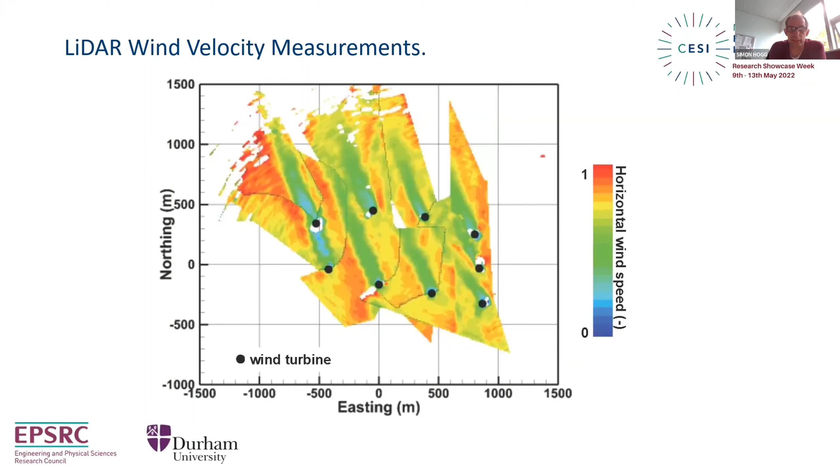You can see from the figures above how, for this regular wind farm layout, there are a number of directions the wind can come from where there's significant potential for interactions between the turbines, and that's borne out in the calculated result at the bottom, where for some wind directions there's quite a significant, almost approaching a 40% reduction in power output. Almost half the potential power output from the wind farm is lost due to these interactions between the turbines.

There are some directions where the interactions are minimal and you get a reasonable power output from the farm, but in other wind directions this has a big effect on the power output. So the piece of work I'm going to talk about now is where we developed a model for calculating this effect, and then applied it to some of the wind farms in the northeast region.

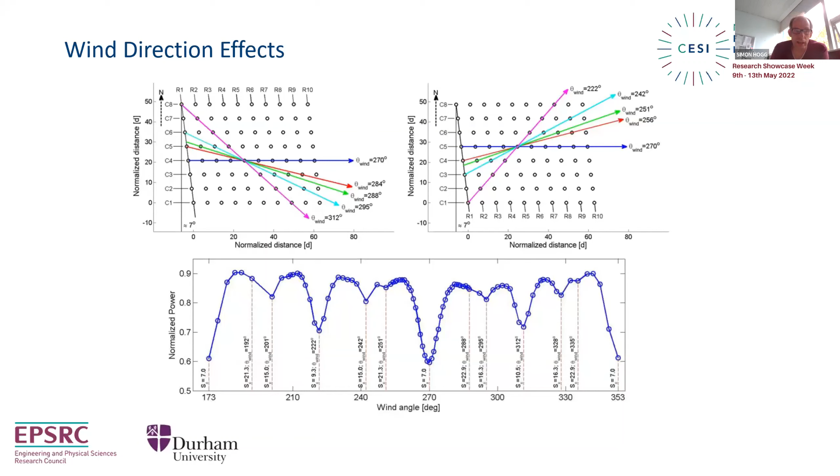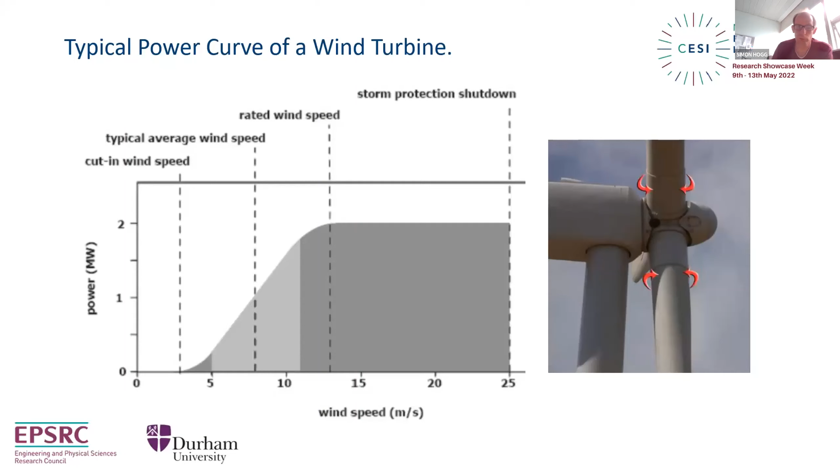Okay, so that was basically for a turbine operating in isolation. Now we need to think about how they interact and how we model that.

And so the wake that's behind the rotor of a wind turbine, as that moves downstream with the air velocity, it's going to spread. So the wakes actually increase in diameter with distance from the turbine. You could sort of see that in the photograph that we started with on the first slide there.

So there is the Jensen wake model. That was something that was actually developed in the 1980s, and it's still widely accepted as a good first order model for predicting how wakes grow as you move downstream from turbines. You can see the model in the expression on the bottom of the slide. So we used that model within the CESI work to model wake growth with distance downstream of the turbine.

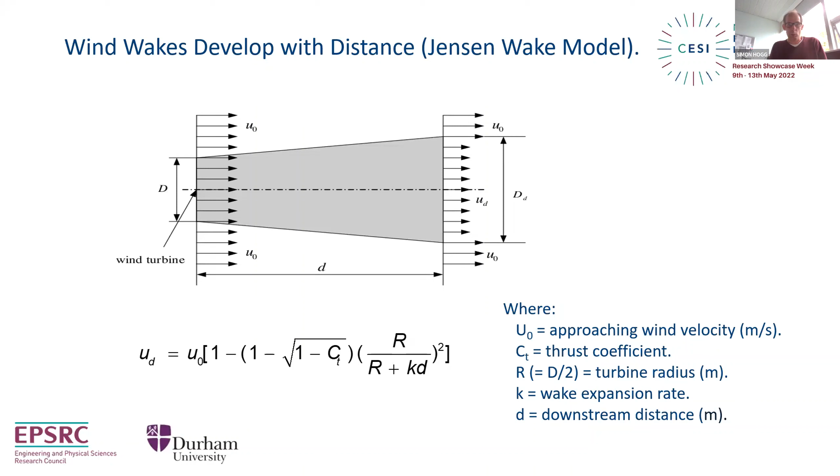So the power curve told us how much the individual turbines would deliver for a given wind velocity. And then in terms of modeling the wakes, this was the first step. And then there's a second important step in terms of then modeling the effect of the wake on the turbines that are downstream of the upstream turbine.

And the alignment between these turbines is such that only a proportion of that wake is interfering or interacting with the turbine downstream. So the model that we developed also needed to have some way of calculating the proportion of the upstream wake that actually interacts with the turbines downstream of it.

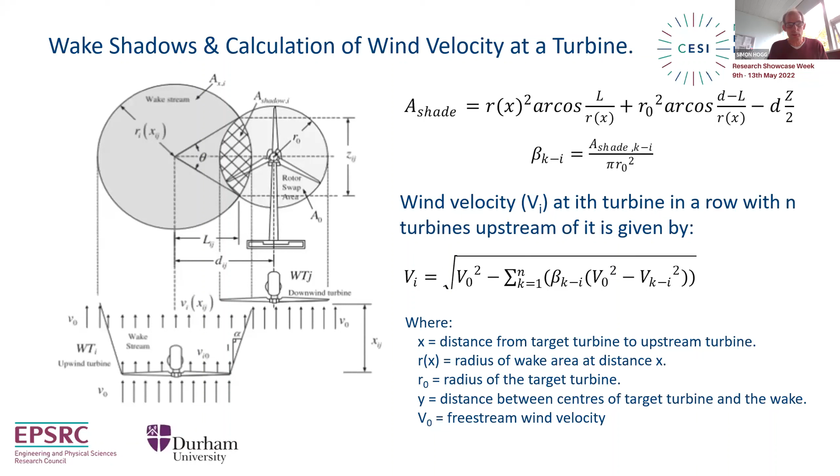So basically we developed the third part of the model, which was once you knew where all the turbines were relative to each other. That was part of the inputs to the model, which would be the power curves from the individual turbines and the locations of the turbines relative to each other.

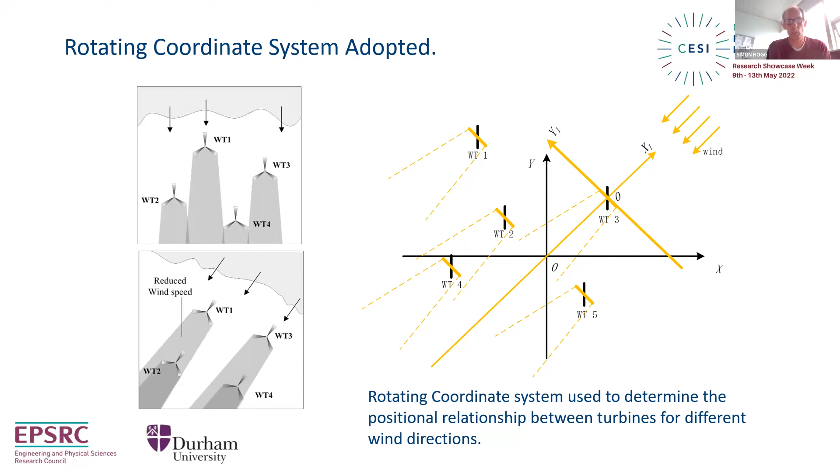Once you knew that, if you selected a wind direction, you can write down a coordinate system that is aligned with the wind in the way shown in the figure, and then the locations of all the turbines can be expressed within that coordinate system. From that you can get the geometries which allow you to calculate the wake interaction effects and ultimately the power output of each of the turbines.

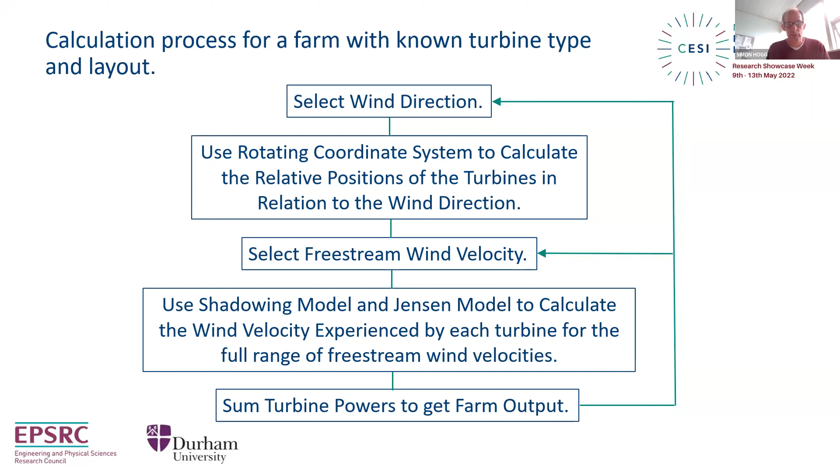So that's a very simplistic flow chart showing the process. You select a wind direction, you know where the turbines are, so you use the rotating coordinate system to align with the wind direction so you can work out where the turbines are relative to each other for that particular wind direction. Select a free stream velocity and then use the shadowing model and the Jensen model to calculate the power output of each turbine, then sum all the turbines to get the overall farm output, and iterate around those loops for each wind velocity and each wind direction.

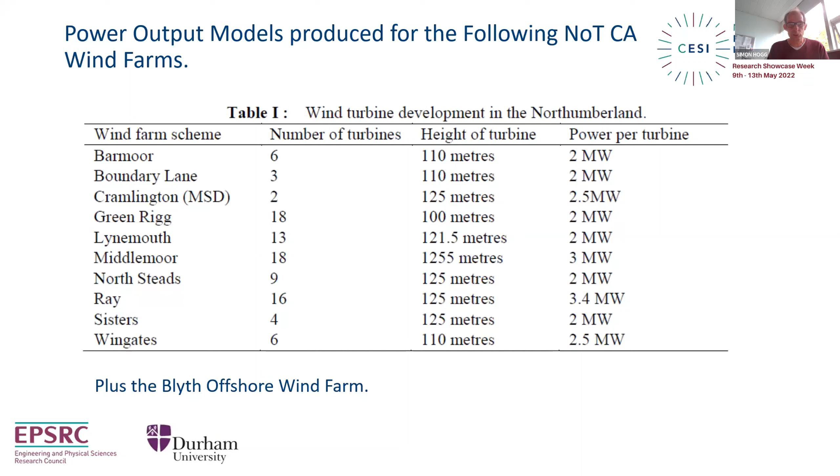So I'll say just very quickly now in my last couple of slides something about one of the onshore turbine farms, and also the Blyth offshore wind farm. So that's the result for the Ray onshore wind farm, which was in that previous table. It was 16 Senvion 3.4 megawatt wind turbines.

The researcher that did this work actually used satellite positions - you can see the satellite photographs, one on the left-hand side there of this wind farm - to locate the turbines relative to each other. That went into the model. When we ran through the model I've just described, you can see the output from it there, which is that surface plot with the two horizontal axes being wind direction and wind speed, and the vertical axis being the power output of the farm. So 16 times 3.4 megawatts gives you something like 54 megawatts in total maximum output.

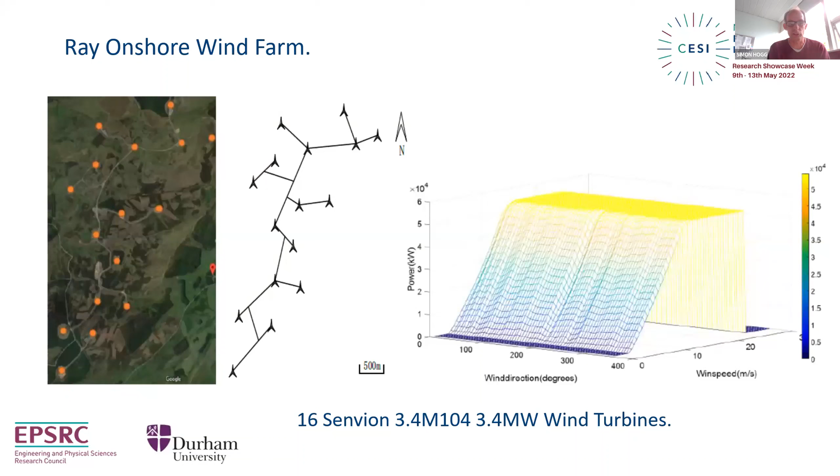You can see from the surfaces there how the interaction effects produce these undulations in the slope surface of the carpet plot, which reflects the different wind speeds, different wind directions, the different interactions between the turbines in that particular layout. Probably a more stark example is Blyth.

Sorry about the picture on the left-hand side there, but the Blyth offshore wind farm - there's only the existing array, the other two arrays aren't there yet. The existing array, the one in dark blue, consists of 5 eight-megawatt MHI Vestas turbines, so 40 megawatts in total. You can see those turbines from Blyth or from Tynemouth Beach even. They are all more or less in a line, as you see in the figure there.

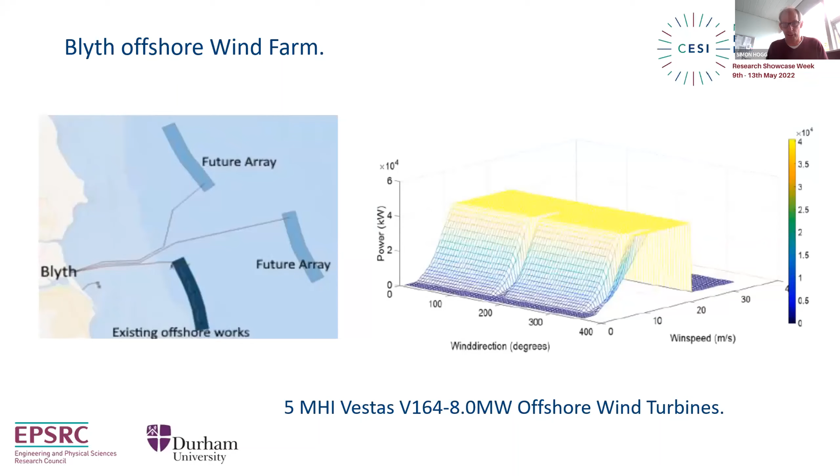The result from the model reflects that, in that you can see these two very sharp deviations in the contours when the wind is aligned in one direction or the other with that row of turbines. For all the other wind directions, you tend to get pretty much very little to zero interaction effects and the maximum output. Okay, so that's what I had for you, just to give a very quick flavour of what we did in modelling wind farms under CESI for the North of Tyne region.

I think now if I hand over to Andrew for the first of his presentations, he'll take you through that. So Andrew, if you can - I think I stopped sharing my screen - so if you can share yours, brilliant. Can you see that all right? Yeah, I can see that. Good, yes, thank you. Okay, over to you.

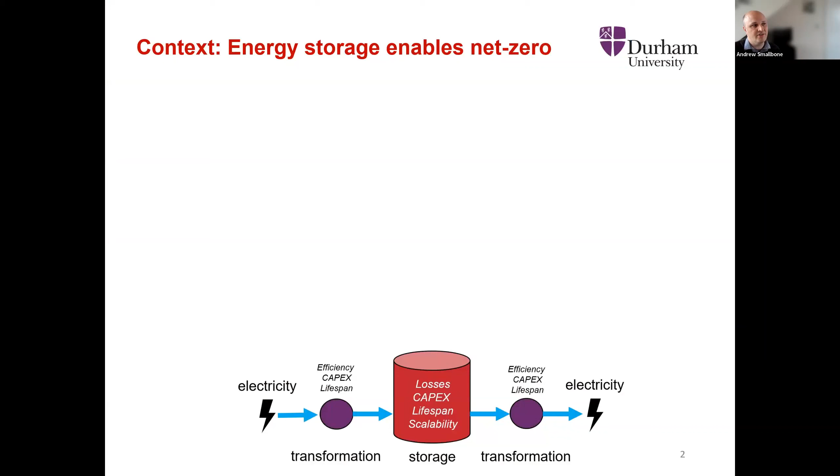Right, thank you very much, Simon. So yeah, this was some work we carried out for CESI in 2017. I was just refreshing some of my memory of doing it, but yeah, so we were looking at the levelized cost, and we did a levelized cost evaluation for energy storage technologies. So I'm Andy Smallbone, I'm an associate professor at Durham, but when I did this I was at Newcastle. So the context of this is, obviously from a future energy systems perspective, energy storage is extremely important, and it could be said that it enables net zero.

So what we were interested in was to explore some of the key technologies that will unlock that, and understand their cost and their impact. So it's got two roles, really. Energy storage first is to enable the greater deployment of renewables and thus to achieve net zero more readily, but also potentially energy storage could be used to displace the role that fossil fuels hold in delivering resilience and flexibility. And what we wanted to really get to grips with was to understand some of the challenges around that. So there are many forms of electricity energy storage, and we wanted to understand kind of high-level questions like which one is cheapest, which one is the most deployable, what's that same world going to look like in 10 years' time?

If you look at that schematic at the bottom there, you can see the terms that we were looking at for energy storage, and if you look across the technology set, actually whilst the input and output of electricity, there's lots of different ways that you can go from the input to the output. So in almost all cases, there is some form of transformation of that electricity into a form that is suitable and scalable for storage. And there are different factors associated with that. It could be some losses, so therefore some efficiency losses through the process. It could be the cost of that transformation in terms of the unit costs or the CAPEX costs, as well as the lifetime of that particular unit.

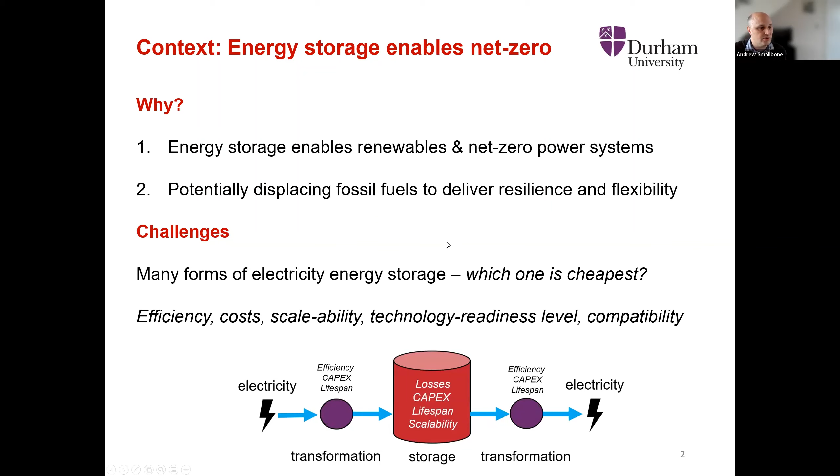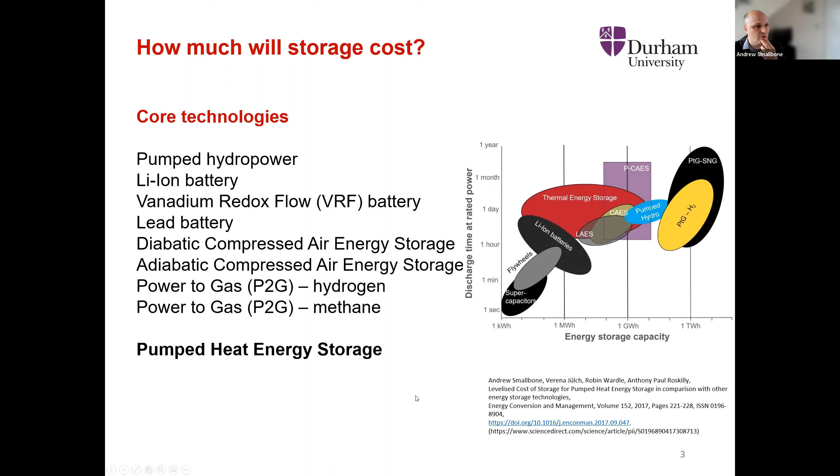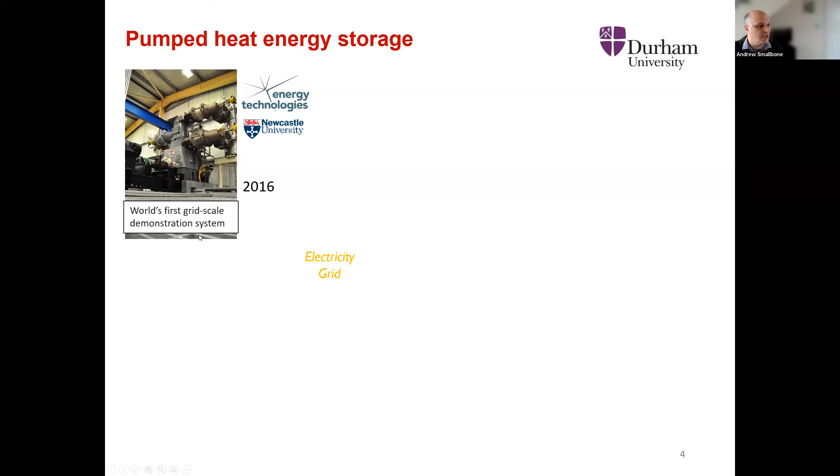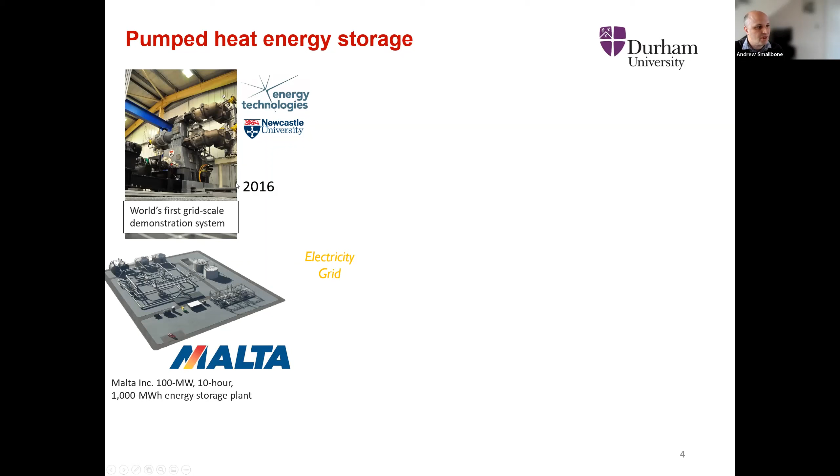So what we were doing is we were working on a concept of pumped heat energy storage with the Energy Technologies Institute from about 2016. During the time of that development, there was a major investment by Malta, which was funded by Silicon Valley, into the same kind of technology. They were developing a 100 megawatt scale system. And over time, that's evolved into an area now of energy storage research called Carnot Batteries. So during that period of time, we were involved in a lot of this, and a lot of the work that I'm presenting now has actually shaped a lot of that.

So the system that we were looking at, and the ones that are really discussed in Carnot Batteries, is not dissimilar to this. The one I've done analysis on here is a system where you take electricity from the grid or a renewable energy source, use that to turn a motor which powers a system running as a heat pump normally as a charge. So as a heat pump, you push a working fluid around the system, and that heats up a hot thermal store and cools down a cold thermal store.

When you decide you've charged the system enough, you stop doing that, and to discharge the system you basically run the same technology in reverse. You use the temperature differential between the two stores to power the rotating machine, which brings electricity back into the wider energy system. You can do that on demand.

What we really wanted to understand is that the storage medium here is a tiny amount of money and very scalable, but you need all the costs associated with everything else to get that to work. So we wanted to understand how that all came together, really.

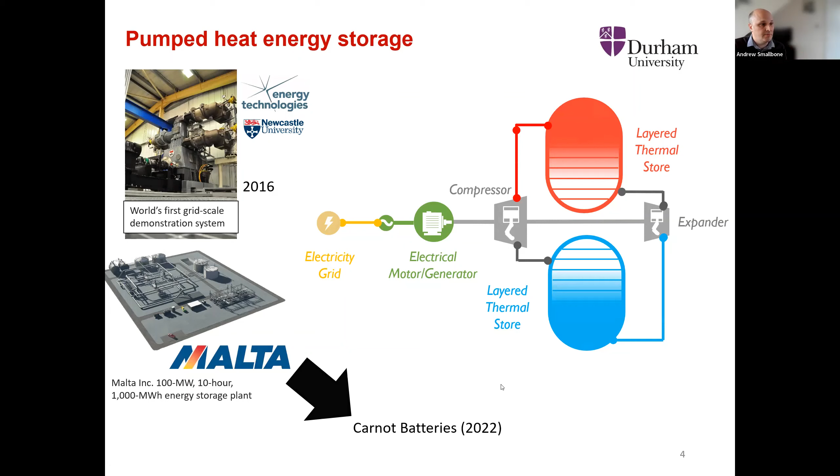So what we were being asked was, how do things like this energy storage technology compare with others? What's the round trip efficiency? We wanted to push the discussion around the cost of storage rather than the efficiency, because our system was cheaper overall but less efficient, and we wanted to understand that a bit more.

The challenges we had were that the technology we'd built was at a low technology readiness level. It was a first of a kind system, and we weren't that sure how to scale up. The common question we were being asked is, what is the nth of a kind cost? So what's not the first system - what's the 10th? If you've deployed this at large scale, what would energy storage from this kind of solution look like?

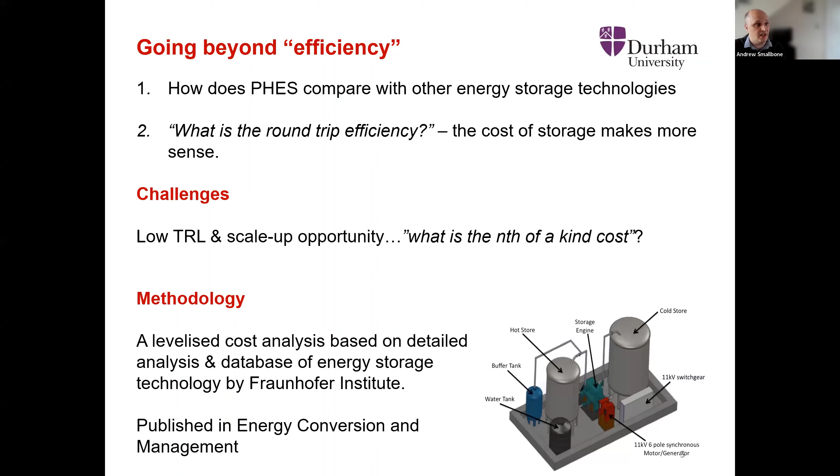So we utilized levelized cost analysis, in strong collaboration with the Fraunhofer Institute, who'd already built detailed libraries of tools and models that can unlock greater understanding of some of the costs. They also had a lot of data on the wider systems, and supported us in developing our own levelized cost analysis of this particular technology set.

What we went out and did was decide on a particular size of system we were interested in. Just for simplicity, it was a 2 megawatt system stored for 8 hours. But if I was to redo this now, I'd probably add another zero or two zeros onto that system to really understand what its impact would be. That's just where the market was back then compared to where it is right now.

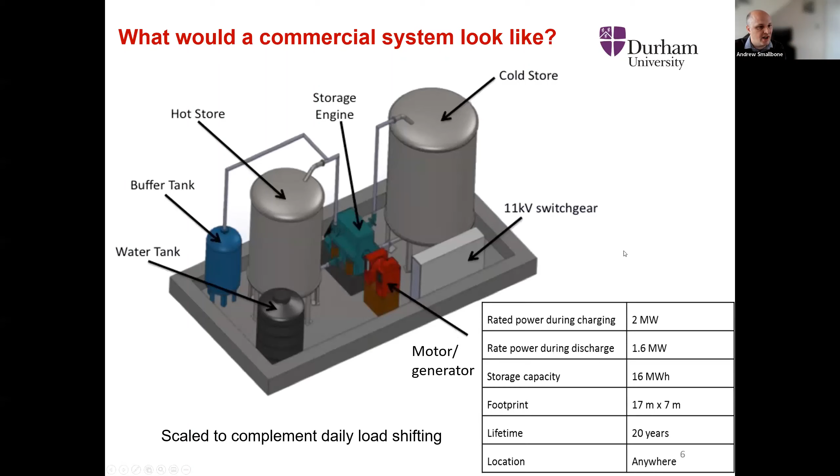So we went through the whole component of the system, and this slide shows some details on that. But to summarize, we went out, looked at each component, worked out what that would cost based on the first design, and then what it would cost if we built that and started to mass produce that particular component. We then verified that against concepts or technologies that were similar and had already reached an nth of a kind.

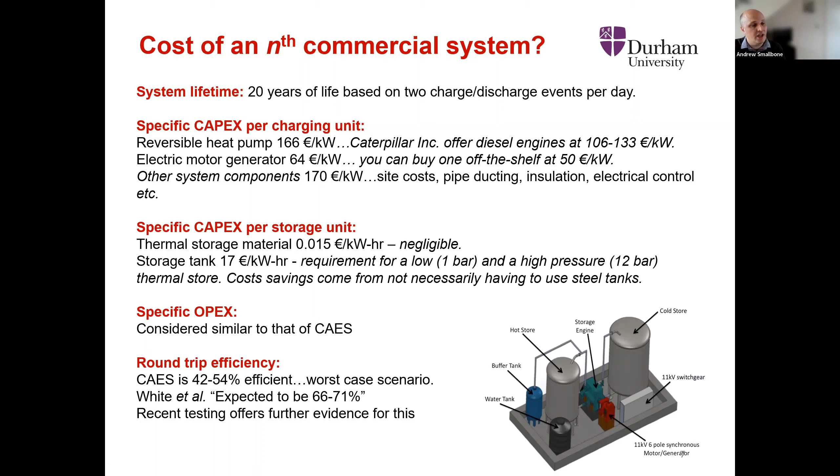A good analogy here is that our reversible heat pump was not dissimilar to a diesel engine. It wasn't the same, but many aspects were similar. So you could use our understanding of the system we'd been working on and compare that with the cost of the diesel engine, which gave us some rationalization of the numbers we ended up fitting into the analysis. We also accepted we didn't know everything, and put uncertainty on a lot of the things in order to understand some of the key sensitivities.

In terms of CapEx, the plant ended up costing between 1 and 2 million euros for the system. We explored the impacts of efficiency, and actually it wasn't that significant. The main cost was actually the cost of the heat pump, and the more work you did on improving the cost of the heat pump, the better return you got on the overall system costs.

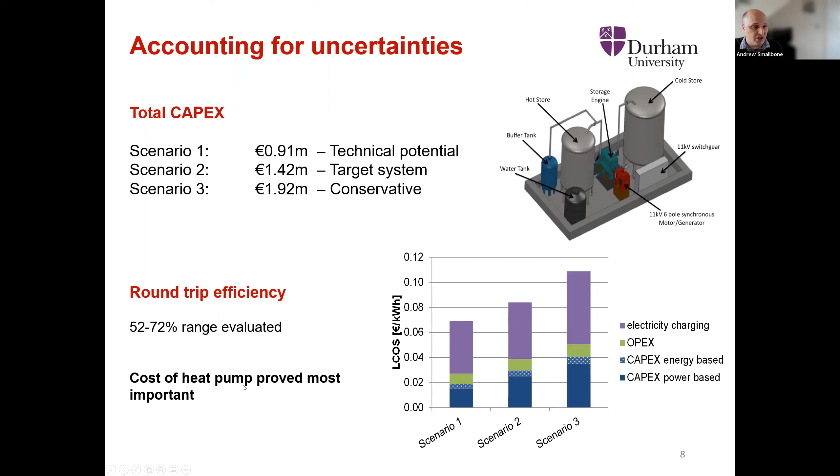But we built the model so we could understand how all of these things came together. Our conclusion really was that even in the worst case scenarios, there was a cost-effective solution around the technology we were exploring.

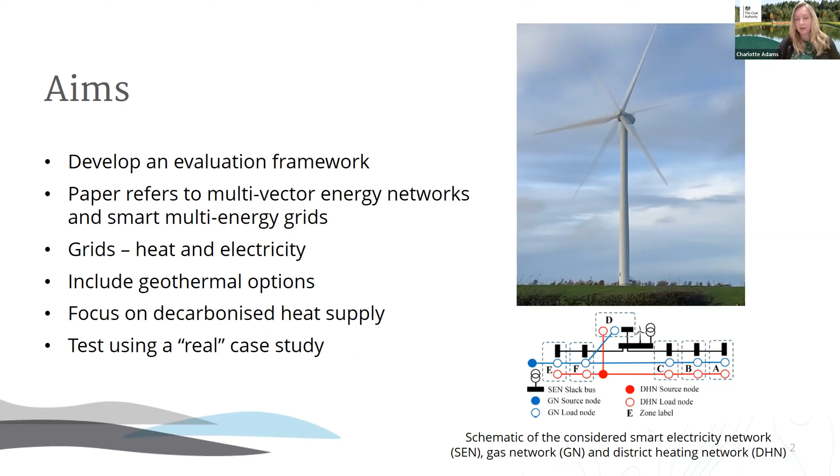Why we were doing this was basically looking at the options for decarbonising heat demand. This is linked to climate emergencies. More recently this is relevant because of the energy crisis, the cost of gas, and also things to do with energy security. If you can produce it locally, you take a bit more control over your energy supply, as well as the need to reduce carbon emissions.

As I've mentioned, this included geothermal, but it also included having a network that had wind and PV feeding into it. We looked at deep and shallow geothermal, which I'll differentiate in a moment. We compared it with all-gas and all-electric counterfactuals. And as I mentioned before, geothermal is often omitted from these kinds of studies, because it produces heat, it's maybe not been thought about so much.

The UK geothermal resource assessment done in the 1980s in response to the oil crisis concluded that the UK does have geothermal resources, but they are better geared towards heat supply with a modest potential for electricity generation. There are a couple of projects in the southwest being drilled for electricity at the moment, but generally the UK's geothermal resources are geared towards producing heat.

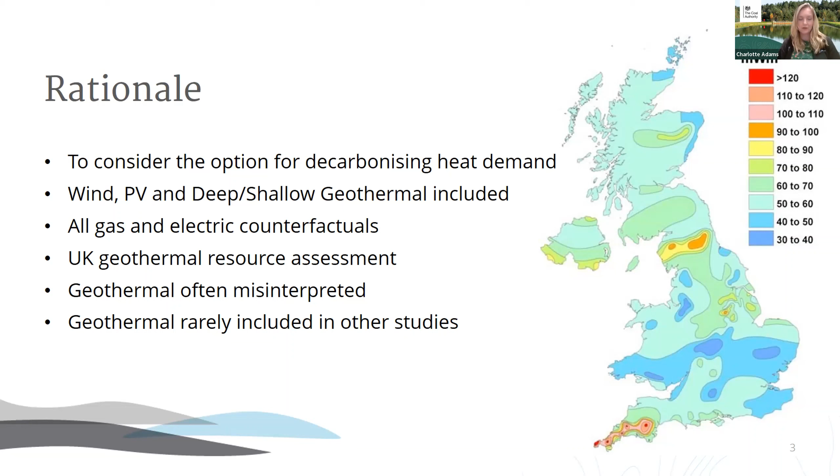So it's about getting the message across to people more widely that you don't need volcanoes for geothermal, you can use it. It's available in most countries, so you don't have to be near a plate margin with really high temperature systems.

Looking at what we put into the model, we included deep and shallow geothermal. The deep stuff was effectively heat that could be used directly without being upgraded by a heat pump, so temperatures of 70, 80 degrees, something like that. The shallow was differentiated by a temperature that would need a heat pump to meet the demand temperature.

The source of all this heat is naturally occurring radioactive processes going on within the Earth. The key thing for these projects, whether deep or shallow, is that water is the energy carrier. You need water down where your reservoir is so you can bring it to the surface, get the heat from it, and put it back to be reheated. Most systems at the moment use water, but in future there's no reason this couldn't be something like CO2 as well, circulated as the fluid to scavenge the heat. That's one area of research moving forward.

This study didn't include CapEx, but there is a trade-off: you can go deeper with deep geothermal systems, and the benefit is higher temperature water, so you might not need a heat pump. But your drilling costs are higher, and your risk of not finding water at depth is higher too, because we don't know as much about subsurfaces at depth. So there's this trade-off between shallow and deep systems.

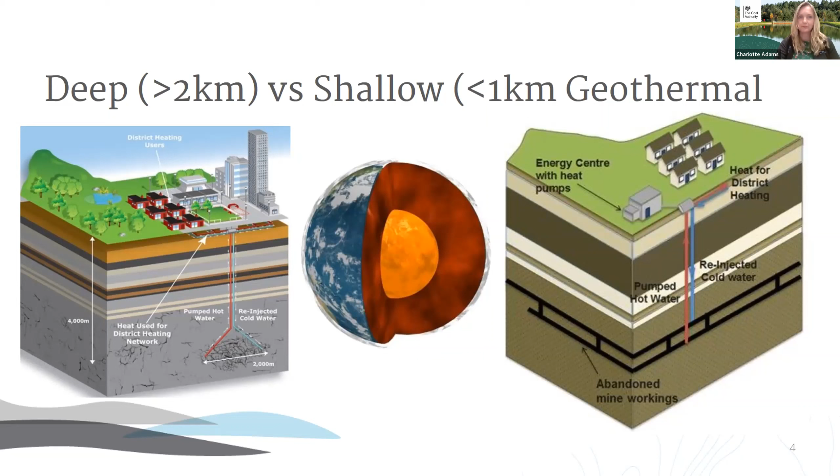We used these kinds of geothermal scenarios for this model and project, but there's no reason you couldn't use a different type of geothermal reservoir, such as an aquifer. We just used the mines in this case because they've got lots of tunnels in them, we know lots of water flows through them, and we had quite a bit of data from them as well.

The approach to developing this model, for me especially with what I'm doing now, was quite liberating because we didn't have to worry about capital costs. It was like, let's just assume all these systems are there doing their thing, and we can evaluate them from a technical, economic and environmental point of view. So it's more on the OPEX side than the CapEx.

The technical parameters were things like energy supply from the upstream network, which allowed an evaluation of supply security and self-sufficiency. The economic parameters were the operational cost and the cost of purchasing alternative energy from upstream networks, enabling us to quantify cost savings from increased integration of energy sources and more use of local generation, and the impact of using more of what you could produce locally. The environmental parameter was the CO2 emissions compared to counterfactuals, again from upstream imports if you were relying on those.

So we got this technical simulation engine, which is how it works first, and once you've worked out how they're all going to interact and work with each other, that can then drive the technical evaluation. The economic and environmental analysis is then performed based on the technical parameter outputs. So you're running the model with all these systems in place, giving you technical results in terms of energy produced, and you use that to do the rest of the evaluation. That's how it was combined.

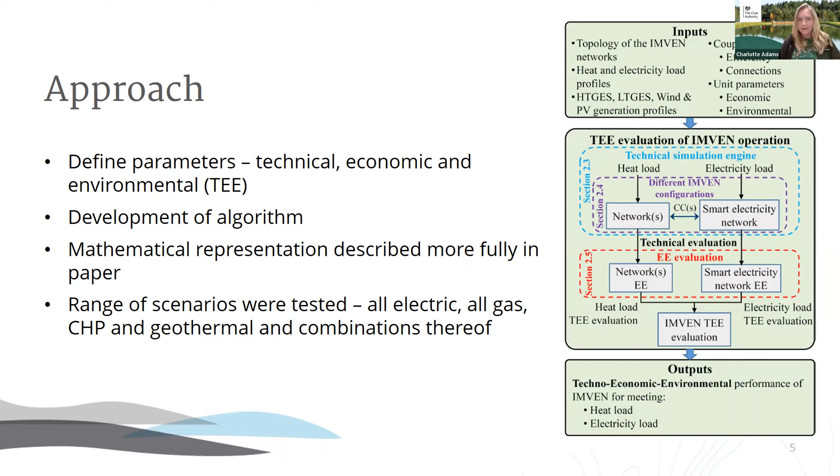There was a whole range of scenarios tested, from all electric to all gas. CHP and geothermal were included, and there were combinations thereof within that.

The case study that was used a lot in the CESI work by a lot of the different work packages was Findhorn, this eco village up in Scotland, which already had some wind farm and PV, so there was data available from that. We supplied the geothermal data from some of our experiences from other sites.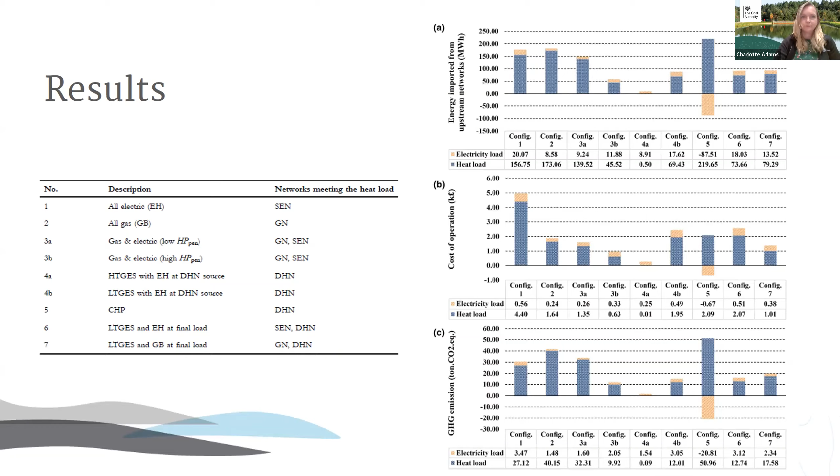So we found the most efficient, cost-effective and lowest carbon was the high temperature geothermal option. Geothermal uses available technology, and it's something we can do now to decarbonize heat - it's what I've moved on to doing now. We are doing it now. It can operate effectively alongside other low carbon energy sources, and it can give a continuous energy or heat supply, so it's quite good for base load.

The conclusions we had are specific to this case study, but I think the model that was built could be used for other areas, and it'd be very interesting to see how that graph of the different configurations changes if you're looking at a different site, maybe with different demands and different inputs. There was some future work identified in the paper as well - looking at this model for a wider region and also at national level, including things like storage into it in future would be good. Also coupling in things like investment planning and optimal scheduling of the components and any storage devices would be something you could build into this to extend it in future.

Thanks. Okay, so this is about hydrogen hub infrastructure and storage, which was a sub-package we were involved in a bit later on in CESI. I think the first thing to say is that the world has changed quite fast around the topic of hydrogen, and it's changing in lots of renewable energy technologies.

This slide basically shows that electrolysis and hydrogen is going to see the most rapid change and rate of growth across all of those particular things, and its potential, and where that's deployed, along with all the technologies that underpin the hydrogen economy, are really interesting. That's the heart of what this project was all about.

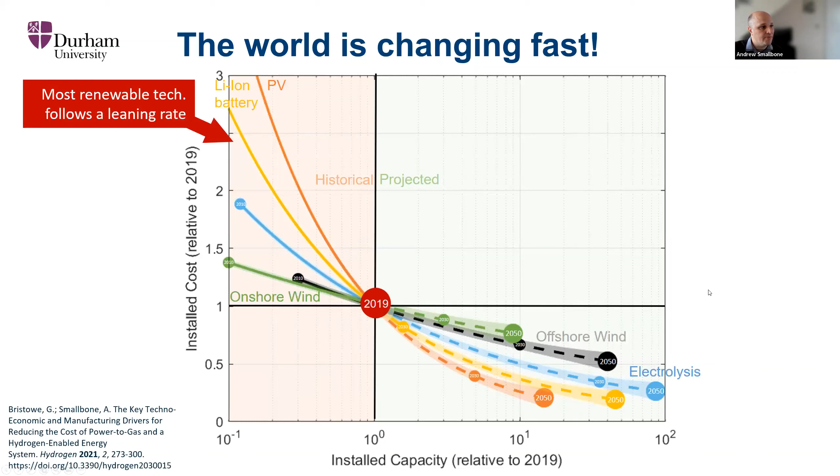The key thing is that it can produce hydrogen directly from renewable energy, which could bring some resilience to the electrical sector. When it's not needed by the electrical sector, it can be used to heat buildings, power transport technologies, act as a commodity for the industrial sector, or as a heat source for heavy and high temperature services required in manufacturing sectors. It can also be transported in the gas network, with huge cost savings for energy distribution, and it can be stored and used in a different part of the season. There's lots of opportunity around it, it's just settling down as to what those opportunities really are. But overall, it's a very key intermediary in whatever net zero looks like.

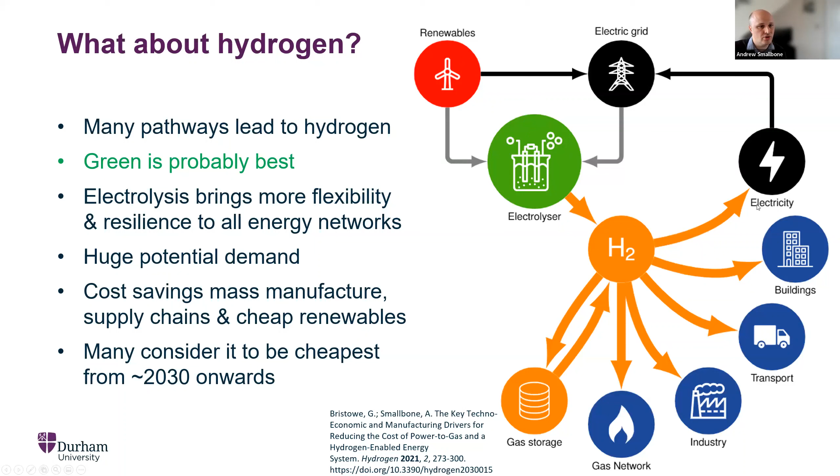Basically, the system we've been modeling and analyzing starts with a connection to the future gas network, where that mixture of gas is either natural gas, hydrogen, or somewhere in between as we transition to a more hydrogen economy. The rest of the system has to be resilient and flexible enough to handle that.

The way you do that is by using a technology called a solid oxide fuel cell. A solid oxide fuel cell is slightly different to the kind of fuel cells we see quite commonly now in transport, for example. Solid oxide fuel cells work at higher temperatures, and they can reform natural gas to produce hydrogen within their own cycle and process.

That produces electricity in the conversion process, which can be deployed for various things, including powering homes, but it can also be stored in a battery, and it produces enough heat that there are other potential end users for that heat. Any outputs from this solid oxide fuel cell can be burnt, producing even more heat, and that heat is used to preheat the air going into the fuel cell stack, and to preheat the hydrogen or natural gas going into that stack. Any waste heat can be utilized to supply a local heat network, for example, meaning this fuel cell can be used as a combined heat and power system.

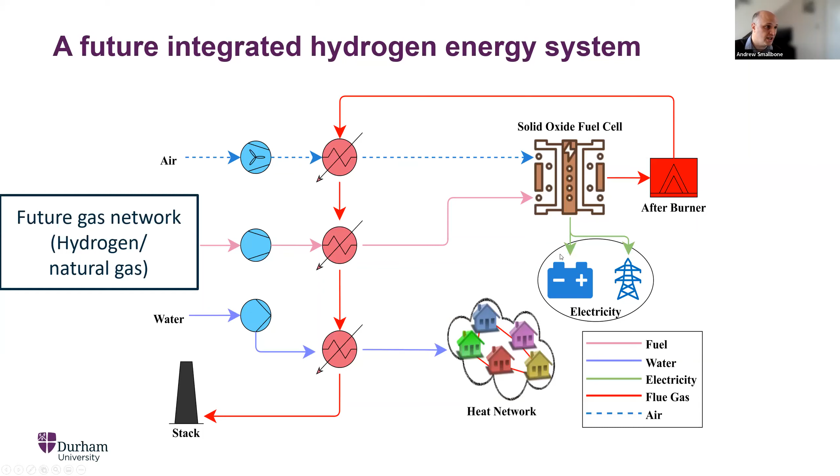We wanted to look at the potential of this, both technically and economically. When you analyze and scale this to around a megawatt-scale system, you can see that the different systems, whether powered by natural gas, shown here as methane, or hydrogen, end up with part of the output as electrical power, shown in red, and the rest as heat. This additional heat is the value from running the system as a process that produces two sources of energy. This increases the efficiency, which is one of the negative aspects of utilizing hydrogen, pushing the efficiency over 80%.

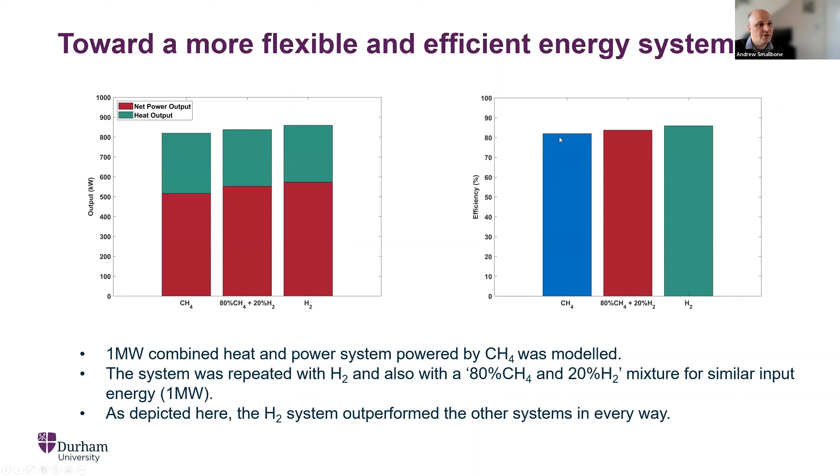Now you can take that kind of analysis and add the technical and economic aspects of it. You can take things like costs from the 2030 timeframe from various sources, including some of our own work, and work out and show that when you take current gas prices and utilize green hydrogen powered by wind, it's not really that much more expensive than where we are currently, with lots more potential to take this forward.

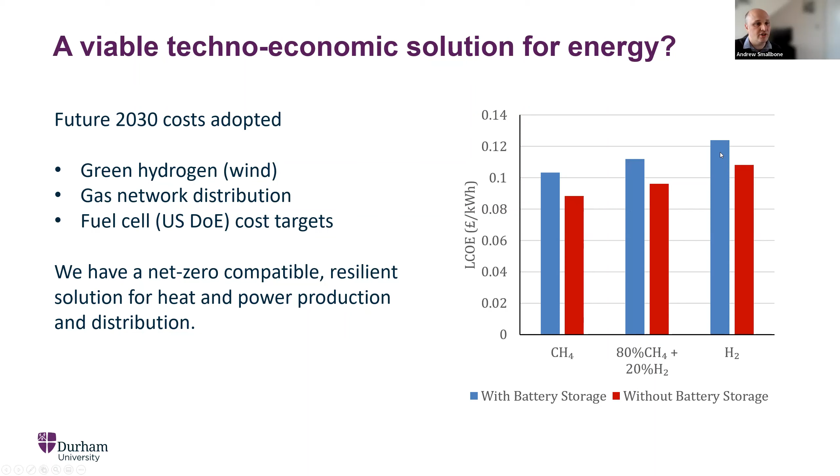So by utilizing the heat from these kinds of processes, by deploying locally within local infrastructure, you can actually get much more value from these kinds of hydrogen energy systems.

So to conclude, giving us enough time for questions, what I've shown here is that the work has demonstrated that things like solid oxide fuel cell systems can offer a technically and economically viable option for deploying hydrogen into local communities.

More generally across our work, across a number of other projects, we're showing that co-locating hydrogen production or hydrogen conversion within local, and next to local heat demand centers, is a very cost-effective option for reducing the barriers and the cost for net zero.

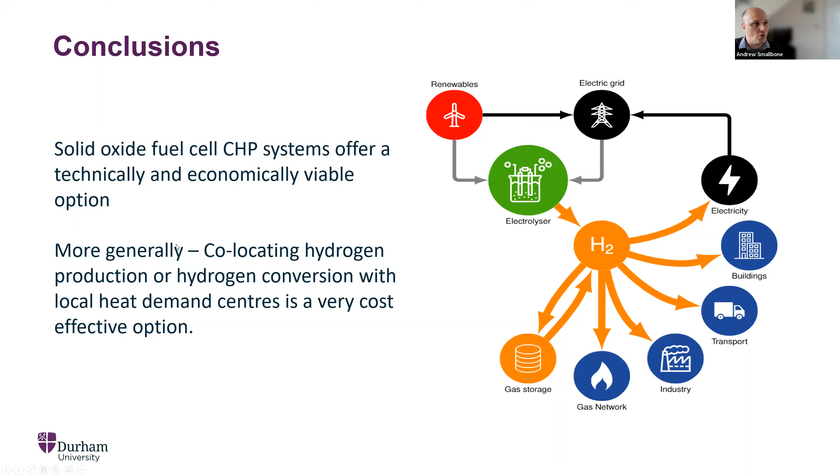Okay, I think that's it from me.